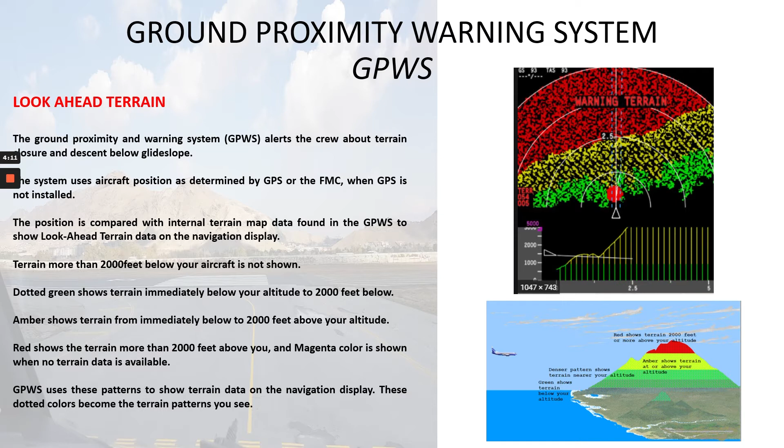GPWS uses these patterns to show terrain data on the navigation display. These dotted colors become the terrain patterns you see. The dotted pattern becomes solid amber when the computer calculates that you will hit terrain within 40 to 60 seconds. An amber terrain alert shows on the navigation display and a voice alert sounds. Solid red shows terrain when the computer calculates that you will hit the terrain within 20 to 30 seconds. Pull-up shows on the attitude indicator and red terrain shows on the navigation display, and a voice alert sounds.

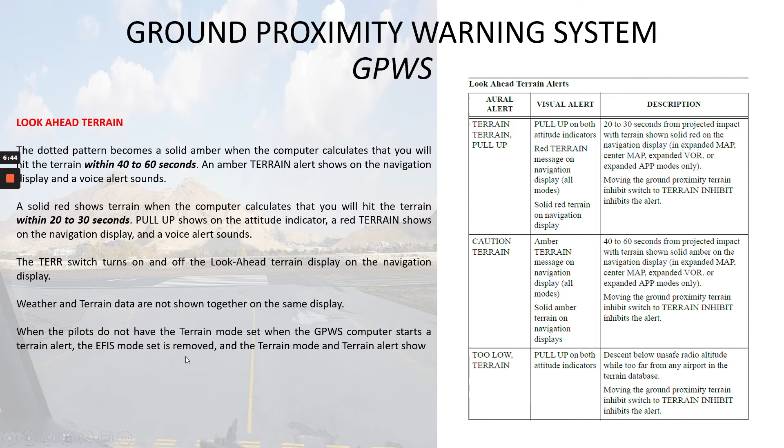The terrain switch turns on and off the look ahead terrain display on the navigation display. Weather and terrain data are not shown together on the same display. When the pilots do not have the terrain mode set and the GPWS computer starts a terrain alert, the EFIS mode set is removed, and the terrain mode and terrain alert show.

Now let's talk about a few abnormals. The terrain inhibit switch is on the GPWS control panel. If the terrain inhibit switch is set to the inhibit position, terrain inhibit shows on the navigation display, and look ahead terrain alerts are not available.

When terrain fail shows on the navigation display, the look ahead terrain operation of the GPWS is not available. The other modes of the GPWS remain normal. When the GPWS failure affects the look ahead terrain operation, the terrain fail alert on the navigation display will also show with the in-op light.

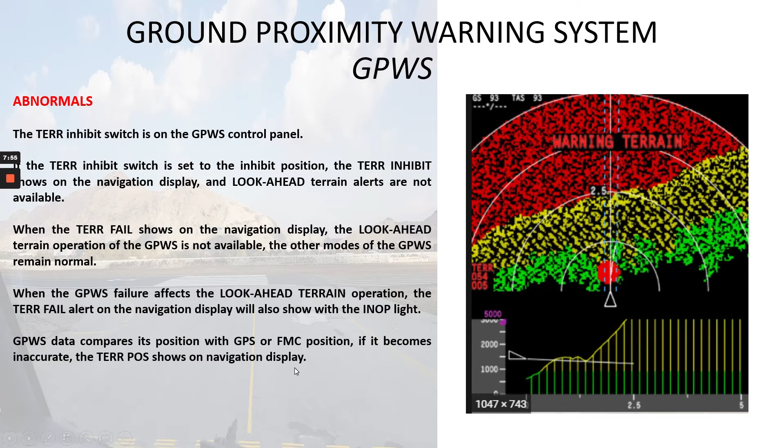GPWS data compares its position with GPS or FMC position. If it becomes inaccurate, terrain position shows on the navigation display. If the in-op light on the GPWS panel illuminates, the GPWS computer has not received correct inputs or has failed.

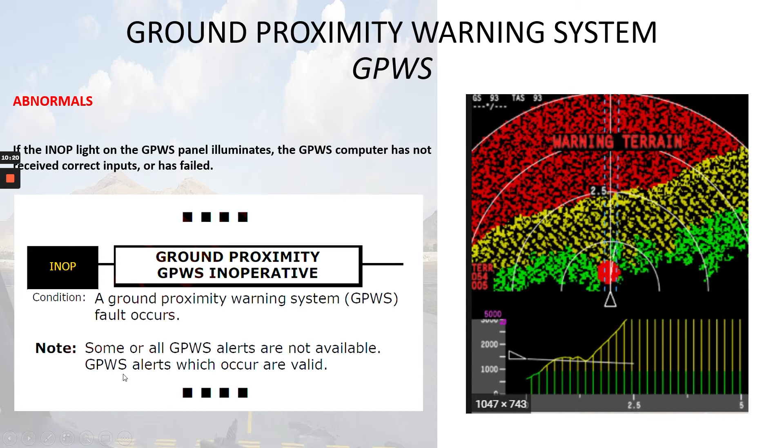Here you can see a picture of the QRH, and it's a very short checklist actually. Condition: ground proximity warning system fault occurs. Note, some or all GPWS alerts are not available. GPWS alerts which occur are valid.

Now let's talk about the overrun warning system for the Boeing 737 MAX. The overrun warning system does not replace the requirement to conduct an en route landing distance performance assessment prior to landing. The lack of an overrun alert does not guarantee the airplane can stop prior to reaching the runway end. If an in-air overrun go around occurs during approach, execute an immediate go around.

Inhibit the overrun alert when landing outside air temperature on the ground is below minus 40 degrees Celsius or greater than 50 degrees Celsius, or gross weight is greater than maximum landing weight.

A new control display unit, CDU, page has been added for the crew to input the expected runway condition. As you can see here, approach reference 2 of 2. Now you can set the runway condition.

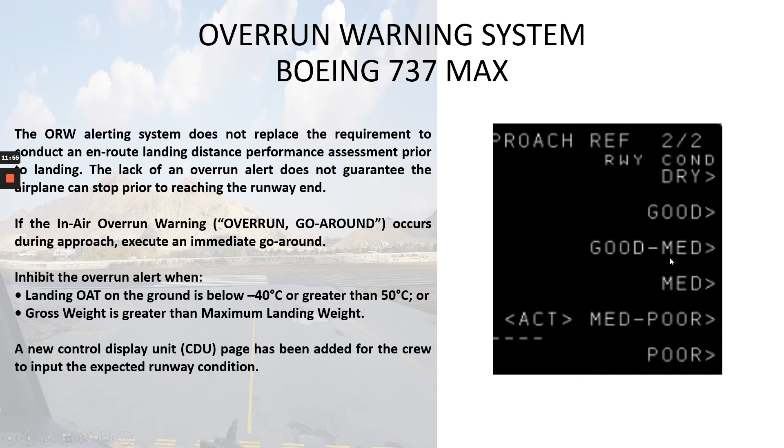Now I think it's important to talk about this bulletin from Boeing. It says testing of the overrun warning system revealed that if a landing runway is not selected in the FMC arrivals page, the overrun warning system will only use a dry runway condition in the system's calculation of landing distance. Thus, if the pilot selects a runway condition that is less than dry on approach reference page 2 of 2, without also selecting a landing runway, the overrun warning system calculation will not compute properly for the degraded runway condition. Operating instructions: select a landing runway in the FMC.

If a landing runway is not available in the FMC and the runway condition is less than dry, disable the overrun warning system in accordance with the overrun warning system inhibit operations supplementary procedure.

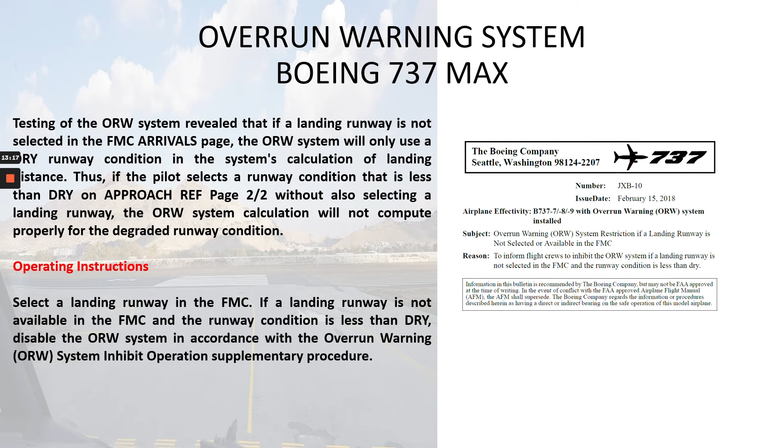Now, if we talk about the in-air warnings for the overrun warning system, the in-air overrun warning alerts the flight crew that an overrun is likely to occur if the approach and landing is continued, based upon the airplane's energy state, the pilot entered runway condition, and the remaining available landing distance.

What are we going to see? It's a visual red go around message on the PFD, as you can see here.

Aural overrun go around issued during approach to advise that continuing the landing will lead to a high risk of a runway end excursion. Warning is armed at and below an altitude of 500 feet.

The aural alert will repeat under the following conditions. Height above the touchdown zone elevation is 150 feet or less, and the alert condition has been true for at least 7 seconds.

And here you can read when the in-air overrun alert is inhibited. There are certain conditions that need to be met in order to inhibit this alert. So you can read all of them here.

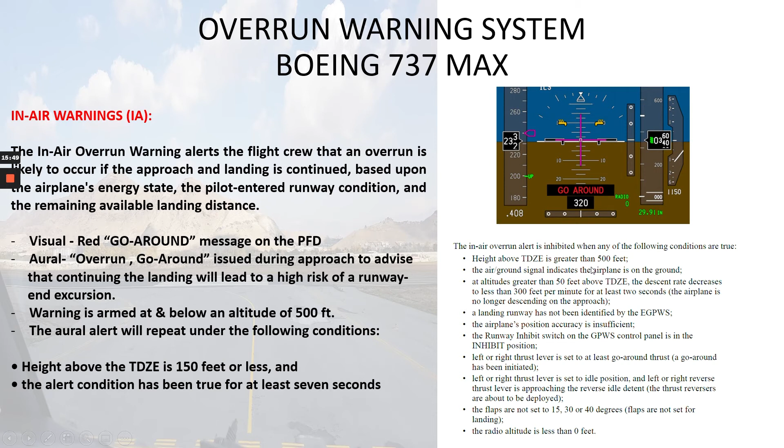Now let's talk about the on-ground warnings. The on-ground overrun warning alerts the crew that they must immediately apply maximum manual braking and maximum reverse thrust consistent with conditions to stop the airplane by the end of the runway.

What are we going to see? We will see on the PFD the message max reverse, red, and we will hear the aural max brakes, max reverse, issued to advise maximum deceleration is needed to avoid a runway end excursion.

The messages are also displayed on the heads-up display if installed. Warning is armed from 3 seconds after touchdown until ground speed is less than 20 knots.

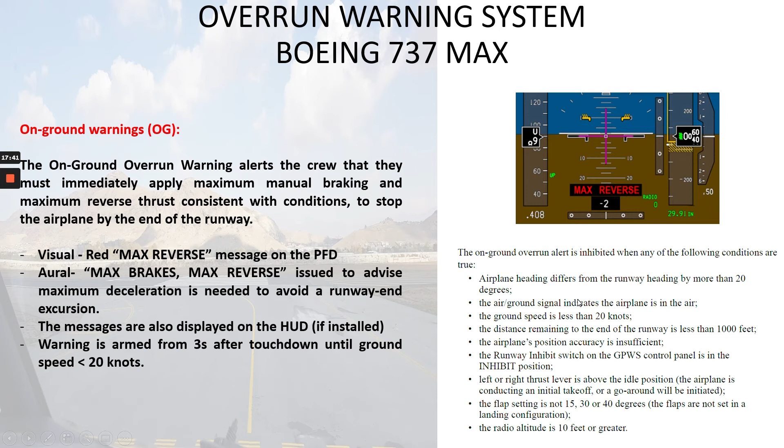And here also you can read the conditions why these alerts could be inhibited.

Now we're going to talk about the runway awareness and advisory system for the Boeing 737 MAX.

So let's start talking about the non-AFM operational information on these two first lines here. One says, do not use RAAS callouts or alerts for navigation. And the other one says, do not use RAAS callouts or alerts as a substitute for NOTAM or ATIS information.

The Runway Awareness and Advisory System provides improved runway and taxiway situational awareness to help reduce runway incursions, primarily with approaching runway callouts, and runway excursions, primarily with short runway aurals and distance remaining callouts.

It compares the airplane's position obtained from the GPS to the airport runway location stored in the EGPWS Worldwide Runway Database to provide specific aural annunciations and visual alerts.

RAAS provides aural callouts along with visual alerts on the navigation display to assist the flight crew with situational awareness during ground operations, approach to landing, and go around.

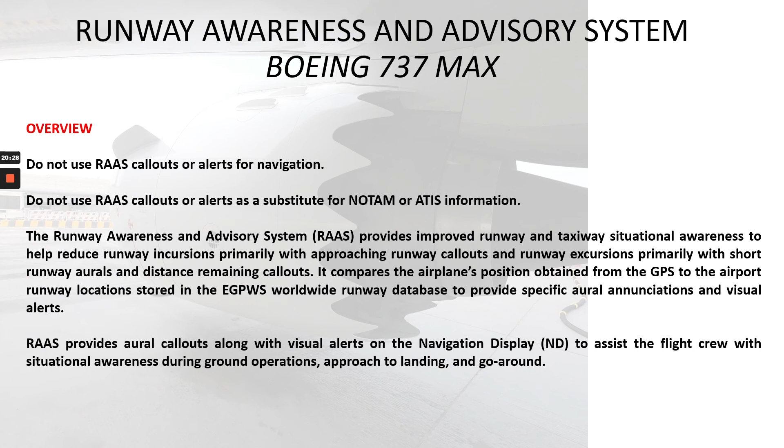RAAS requires the following databases or systems for proper operation. Terrain and airport runway database is in the GPWS computer. Airplane is on or approaching an airport in the RAAS airport runway database. Global positioning system and other required signals are available, and accuracy meets minimum requirements.

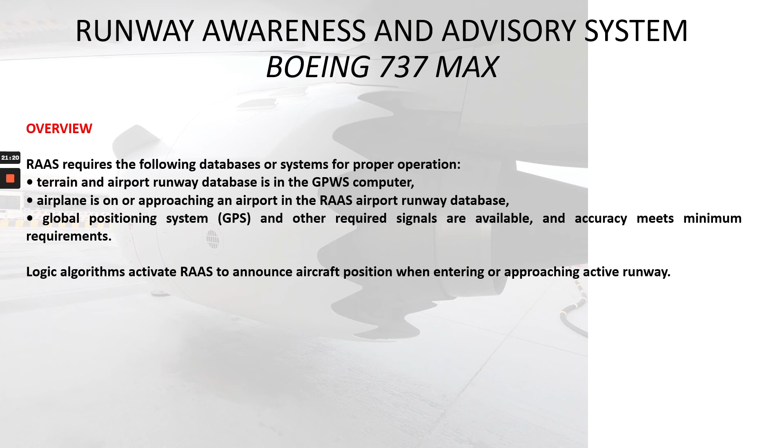Logic algorithms activate RAAS to announce aircraft position when entering or approaching active runway. RAAS callouts and alerts may be inhibited by the runway inhibit switch, as you can see here.

And you can see here where the ground proximity warning system panel is located. To alert the crew, the runway INOP light, which is this one here, will illuminate if the runway inhibit switch is in the inhibit position and the airspeed has been 250 knots or greater for at least 60 seconds.

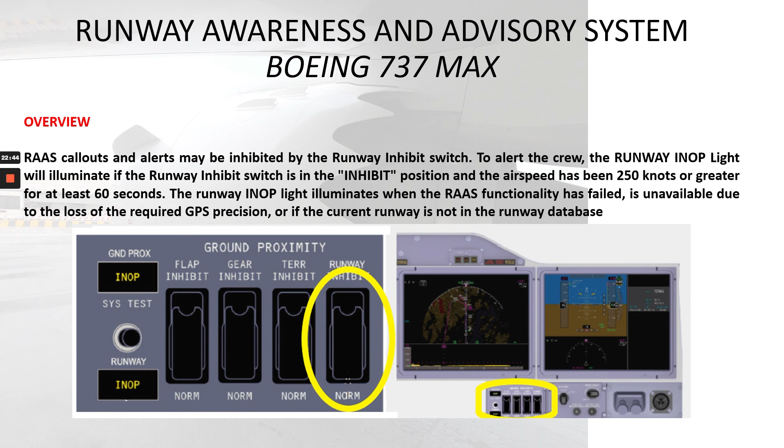The runway INOP light illuminates when the RAAS functionality has failed, is unavailable due to the loss of the required GPS precision, or if the current runway is not in the runway database.